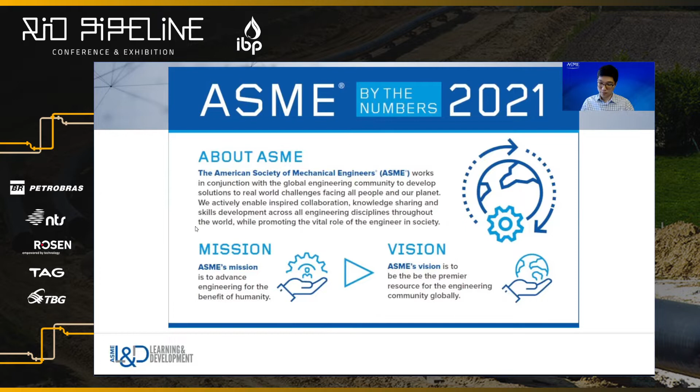Here are a couple statistics about ASME. We were first founded in 1880, and up until today we have over 90,000 ASME members, including students as well as early career engineers. We have members in over 135 countries, and over 350 ASME staff, including offices in New York, New Jersey, Texas, Washington D.C., as well as a couple international locations.

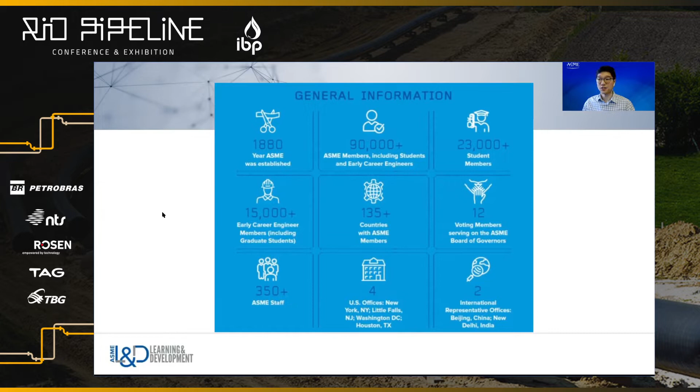Moving on to the bulk of our presentation, we'll be going into ASME codes and standards.

The ASME standards and certification mission is to develop the best, most applicable codes, standards, and conformity assessment programs in the world for the benefit of humanity. This involves the best and the brightest people from all around the world to develop, maintain, and promote the use of these ASME products and services.

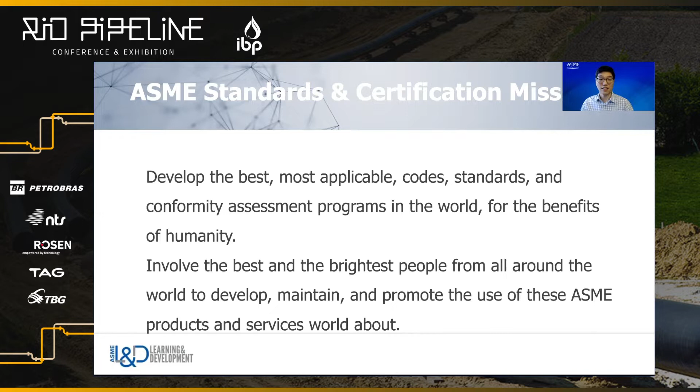Just a couple specific standards and certification statistics: we have over 700 standards and certification committees, over 550 standards, and over 6,000 volunteer members overall, including 1,000 from outside of North America. And we have around 7,000 certified manufacturers in over 75 countries.

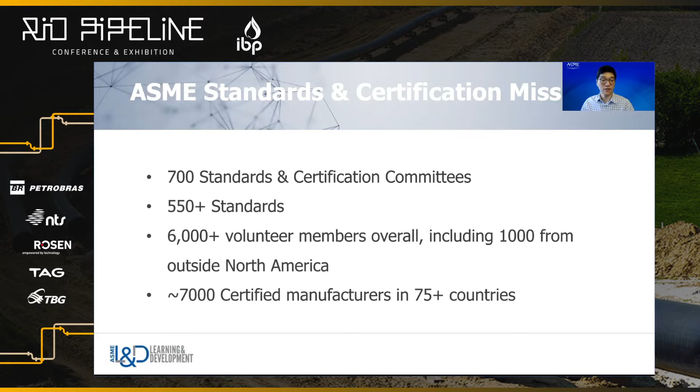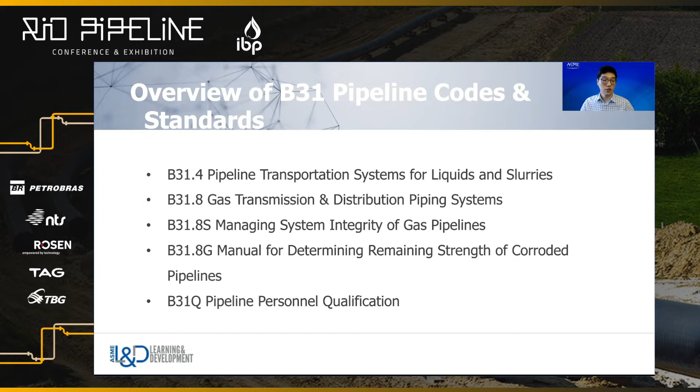Here's a brief overview of the B31 pipeline codes and standards we'll be going over today. First, B31.4, which is pipeline transportation systems for liquids and slurries. B31.8, which is gas transmission and distribution piping systems. B31.8S, which is managing system integrity of gas pipelines. B31.8G, which is the manual for determining remaining strength of corroded pipelines. And lastly, B31Q, which is pipeline personnel qualification.

Moving on to B31.4: the scope of this standard is for piping transporting products which are predominantly liquid between facilities, plants, and terminals, and within terminals, pumping, regulating, and metering stations. The latest edition was published in 2019, and it provides requirements for piping transporting liquids and piping transporting aqueous slurries of non-hazardous materials. These liquids include things such as crude oil, natural gasoline, liquid alcohol, and much more.

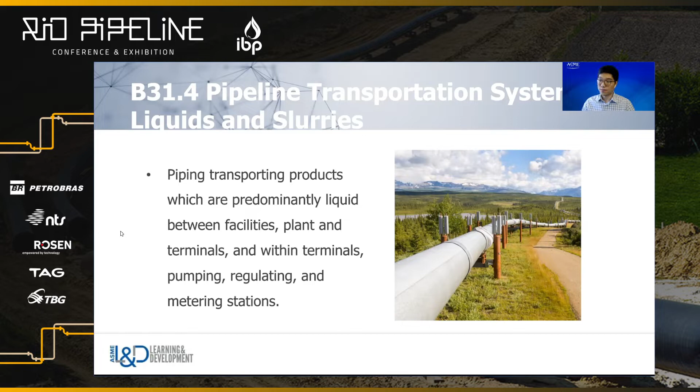Moving on to B31.8: the scope of this standard is for piping transporting products which are predominantly natural gas between sources and end-use services. This standard was published a year ago in 2020, and it provides requirements for onshore and offshore pipeline facilities used for the transport of gas, as well as gas gathering pipelines and gas distribution systems.

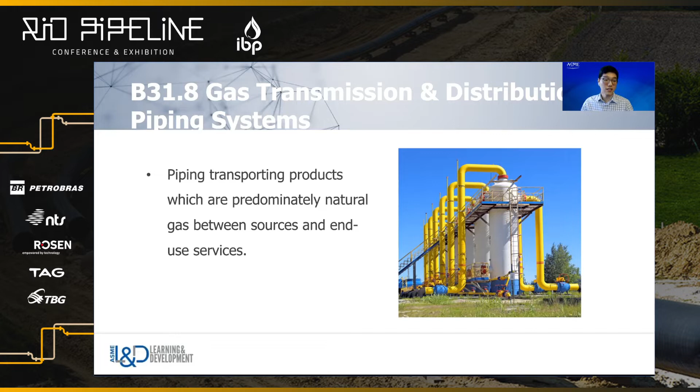Next we have B31.8S. This applies to onshore pipeline systems constructed with ferrous materials and also for transporting gas. The principles and processes embodied in integrity management are applicable to all pipeline systems. The latest edition was in 2020, and the code is non-mandatory, designed specifically to supplement B31.8. Managing the integrity of a gas pipeline system should be the primary goal of every pipeline system operator, because it keeps the employees safe as well as the customers.

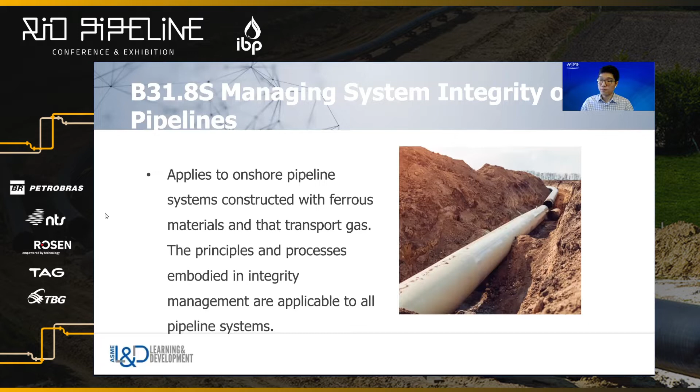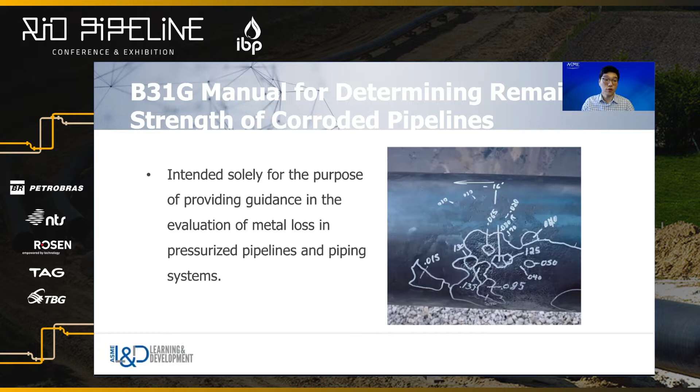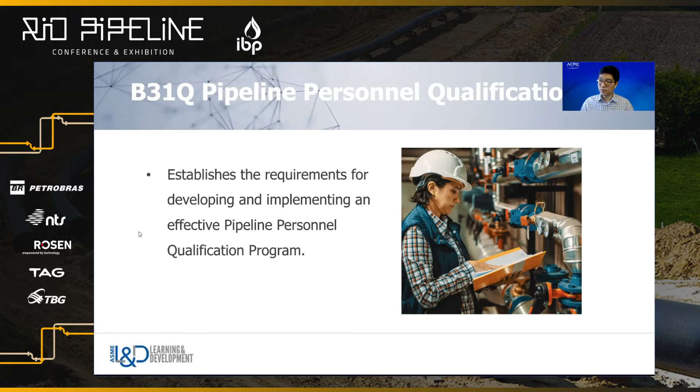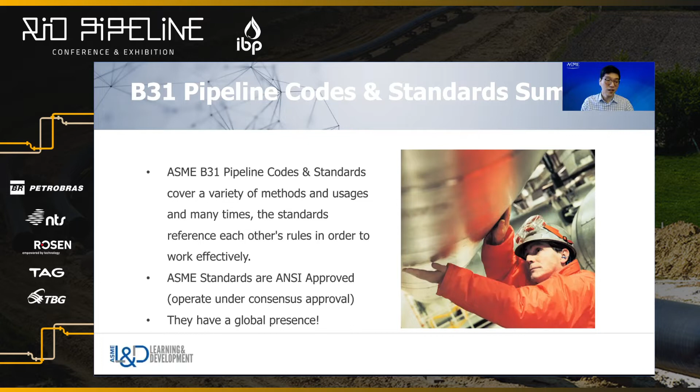Just a quick summary of the B31 pipeline codes and standards overall: these codes and standards cover a variety of methods and usages, and many times the standards reference each other to work effectively and coherently. ASME standards are also ANSI-approved, and they operate under consensus approval. Overall, they have a global presence—there are a lot of countries that purchase B31 standards and codes, some specific ones being Japan, Canada, United Kingdom, as well as the Netherlands.

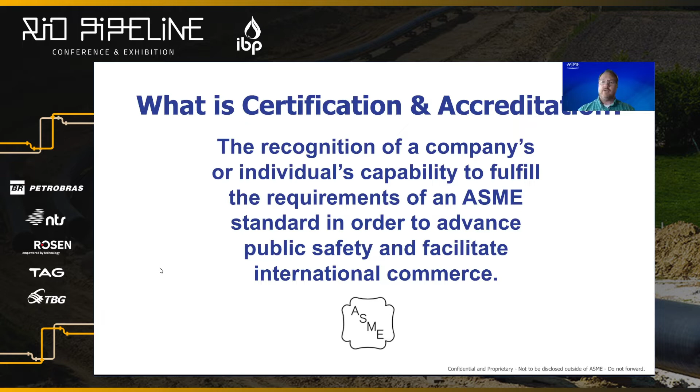So what is certification accreditation? This is the recognition of a company's or individual's capability to fulfill the requirements of an ASME standard in order to advance public safety and facilitate international commerce. Underneath this sentence is what's called the ASME single certification mark, which is applied to most of the products that are manufactured in accordance with one of our standards.

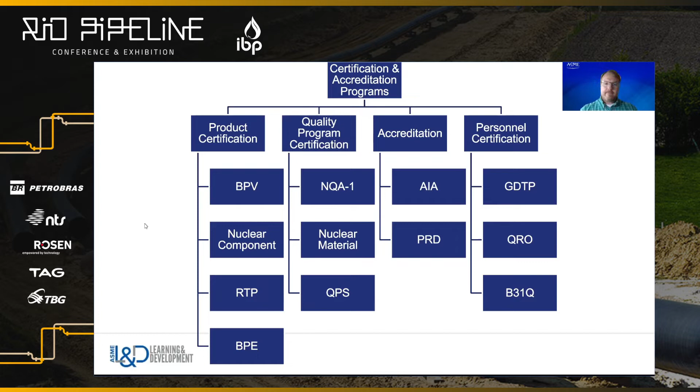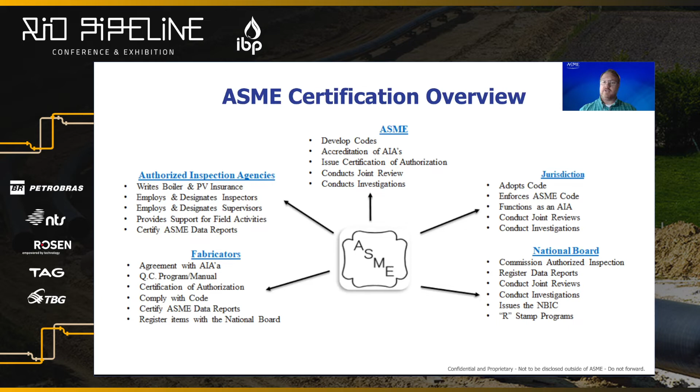And then finally is our newest certification program, Quality Program for Suppliers. There's a few things about this standard that's new, where it's a generic quality program standard for manufacturers and suppliers to focus on quality of their products or services. It can be used by industry for any products or services not specifically covered underneath the ASME boiler pressure vessel code. Coming to mind are some of the B31 standards that Ji-Hoon mentioned. All of these could be applicable underneath the QPS program for certification.

There's no authorized inspection oversight in this program, and it operates a little bit differently, where in order to maintain the certification in good standing, a company will go through an annual audit, and instead of stamping any kind of final product, there would be a certificate of conformance associated with it at the end of the process or service.

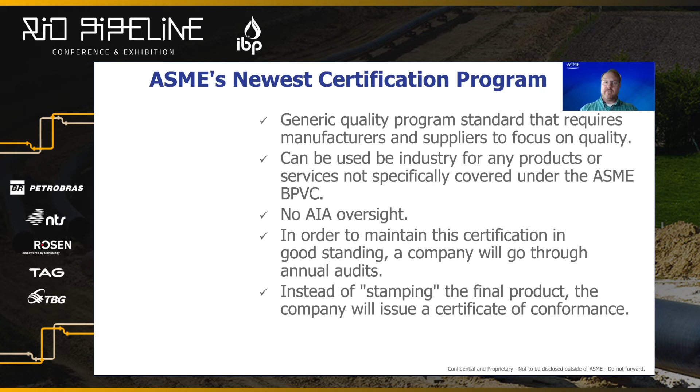Thanks, Mike. So just to give you a little overview of our Learning and Development team, L&D at ASME, we're an accredited provider of training courses and training programs. And our mission is to advance the skills and grow careers of engineering professionals and their teams.

A little bit further about that. So what we do is we provide high quality courses that we develop and facilitate. And those courses cover a wide range of practical, technical, business, and standards and codes, ASME standards and codes, as Ji-Hoon and Mike mentioned. Our courses are available in both live and on-demand formats.

And our courses are taught by and or developed by practicing engineering professionals, many of whom sit on the very code committees that develop the standards that we talked about already. And really what we try to focus our courses on is centering around real world experience, case studies, and making sure that we really focus on application of codes or whatever the topic being taught is.